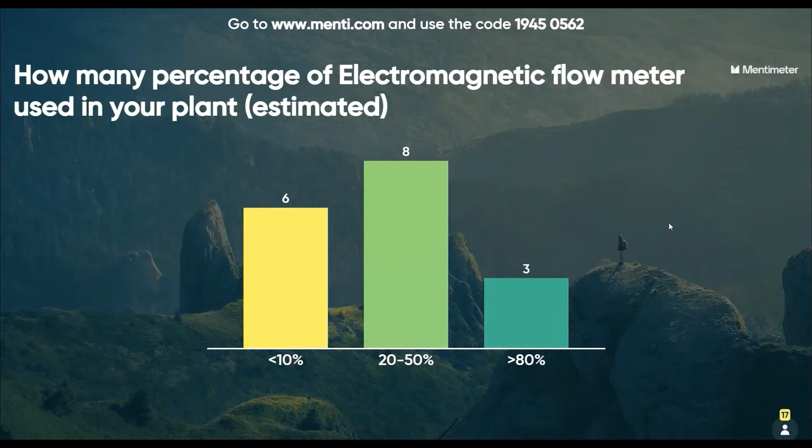And the next question: which function or design would you wish to have in the electromagnetic flow meter? So anything you like for a new function to be added, or a new design also. Just type in your smartphone or your laptop freely.

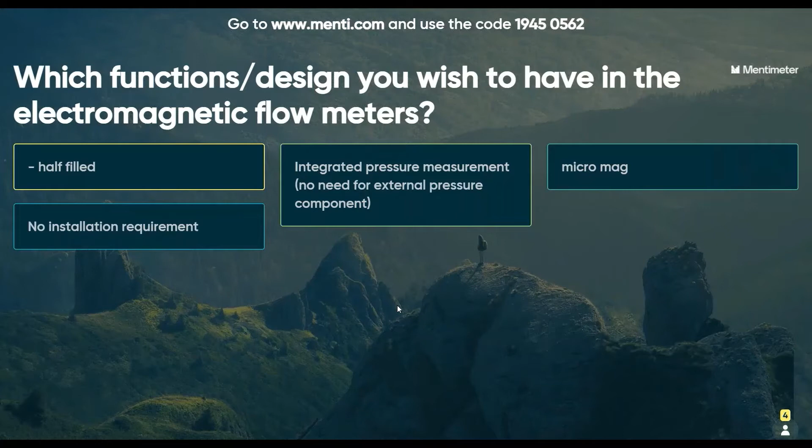Okay, I see some already responded. Half fill, yeah, okay. Normally electromagnetic flow meters require a full pipe, but if you have half fill, you would like to have this. Half fill pipe again, no installation requirements. Okay, maybe I can understand that no inlet or outlet run required. Integrated pressure measurement, no need for external pressure components.

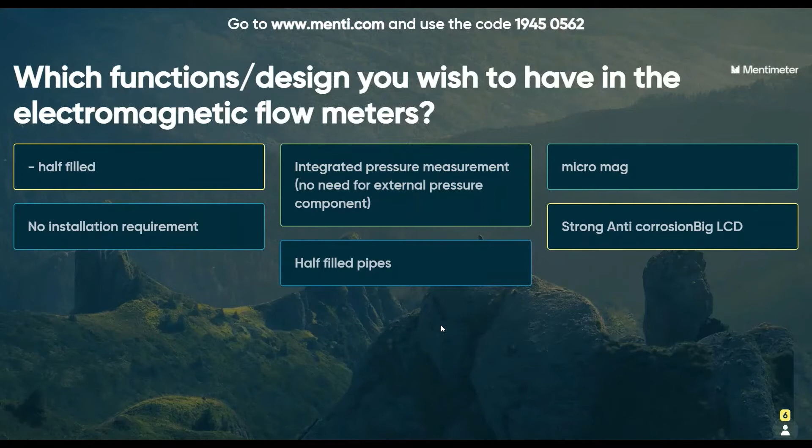Okay, it makes sense. Micromag, yeah, this is for a very small one to use on utilities, if I understand correctly. And at Endress Hauser, we have the Picomag, which can fulfill that for utilities, very small, like pocket size. Strong anti-corrosion, and big LCD.

Okay. We will also have something like that in the near future for the big LCD as well, but not this one. The other transmitter type, anti-corrosion: you can have anti-corrosion based on the electrode selection and the liner selection. Our liner material and electrode material can fulfill almost any application, not only for corrosion but abrasion and other things.

Okay, empty pipe detection, minimum straight run. Yeah, empty pipe detection we also have in almost all our electromagnetic meters. And minimum straight run, there you come to the point. Yeah, we will come into that as well today.

For the half-filled pipe, we also can do this when we do the reduced bore. Electromagnetic meters are normally full bore, nothing inside. But if you have low flow, it can create the phenomenon of only a half-filled pipe, and this creates inaccuracy. So we can use the reduced bore, and at Endress+Hauser we also have that, which also does not require any inlet and outlet runs. But today we will talk about something more than that.

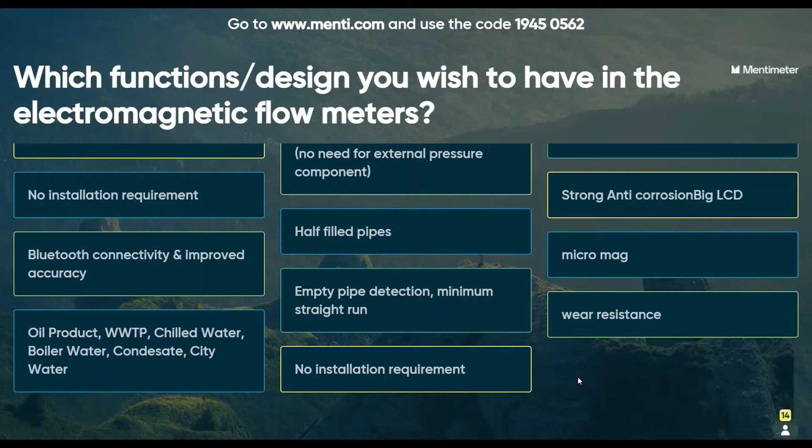Wear resistant, yeah, also the same as for anti-corrosion. No installation requirement, yeah, you'd like to put it there and forget it. Okay, we will come to that. Measure volume flow, yeah, this measures volume flow in the first place. This is the primary variable, volume flow. Okay, partial fill, like before.

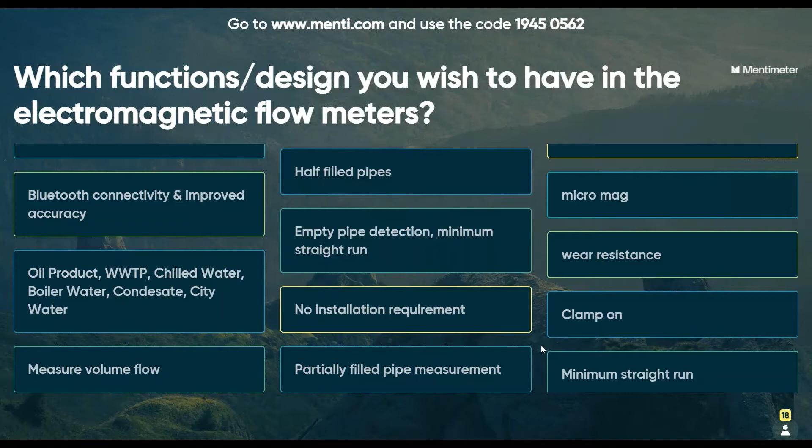Clamp-on. This is very interesting, but mostly we do it with ultrasonic. For mag meters, normally we use inline or sometimes insertion only. It needs something intruding into the pipe first. Okay, minimum straight run. Okay, no preferences. I don't understand this one well. Strong anti-corrosion. Okay, quite a number of requirements.

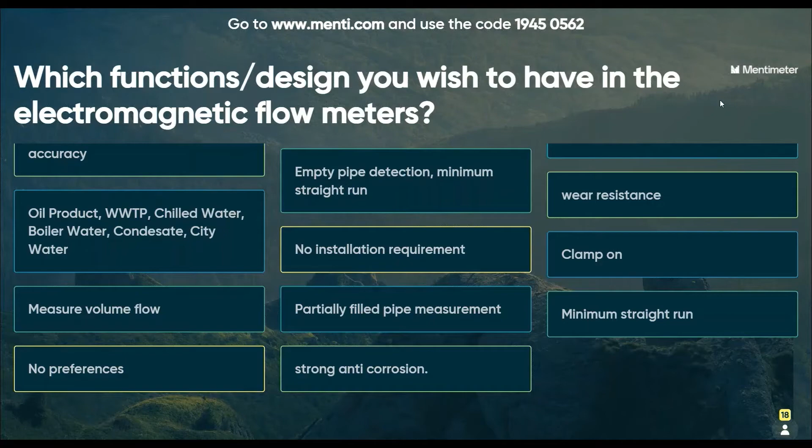Thank you for that. I think now we can come to our presentation, and you will see if we can reach your expectations or your wishes today. Okay. Now I will change to my presentation. Thank you very much for your answers. And now we will go to the next one.

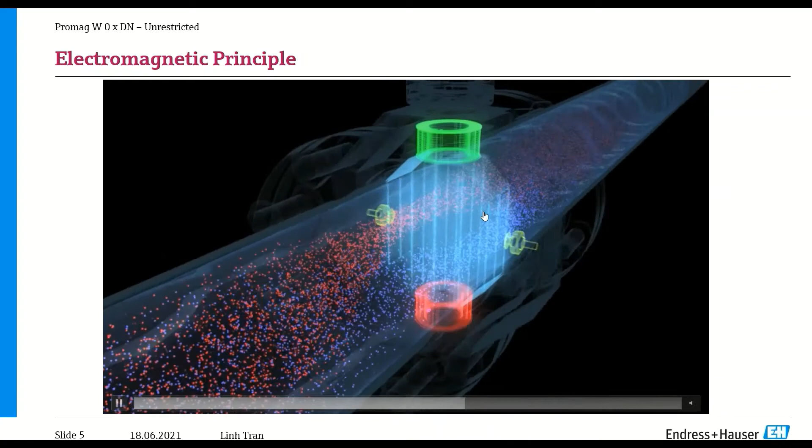First, I would like to come back to the electromagnetic principle. All of you may know about it. We use a conductive liquid, with the blue and red colors representing the plus and minus charges. When we have the coil with the electromagnetic field and the electrodes like this, they separate the minus and plus charges inside, and then they create a voltage difference.

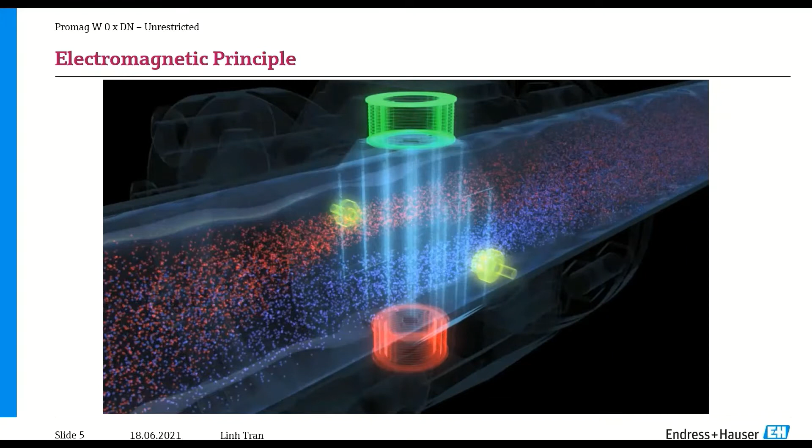And it depends on the velocity. From there, it measures the velocity inside the pipe, and together with the inner diameter of the device, the electromagnetic meter can calculate the volume flow. This is the basic, and this video is already available on our YouTube channel. Okay,

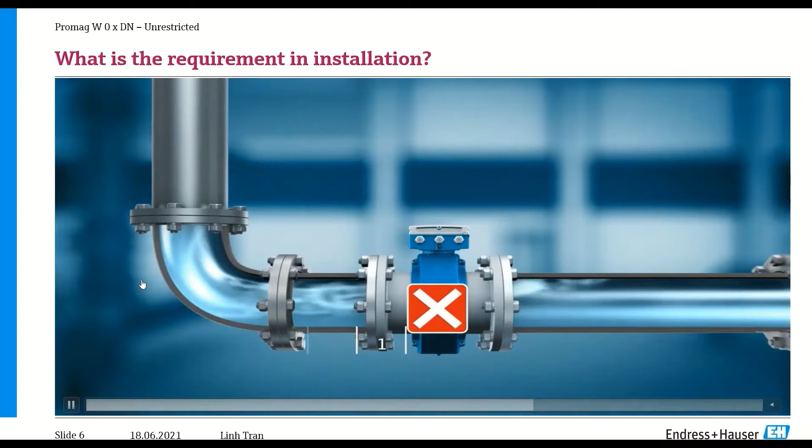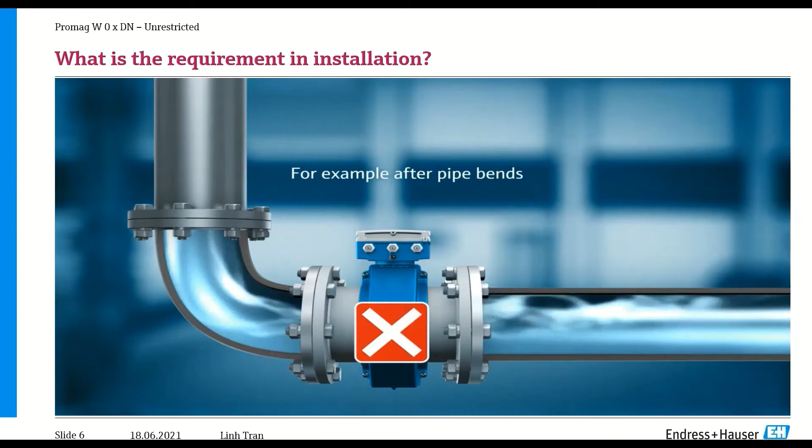so this is a very basic one, but with the electromagnetic meter, the installation requirement is that you cannot install it directly after a bend or any obstruction, and it needs a certain pipe length. We call it the inlet run in front and the outlet run behind, required to achieve a sufficient flow profile to make the measurement possible and the accuracy in an acceptable range. So with electromagnetic, we need sufficient inlet and outlet runs for the measurement, and also for accurate measurement.

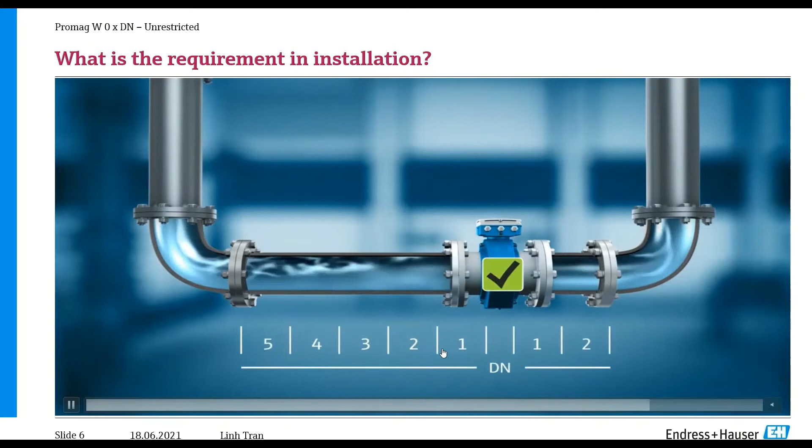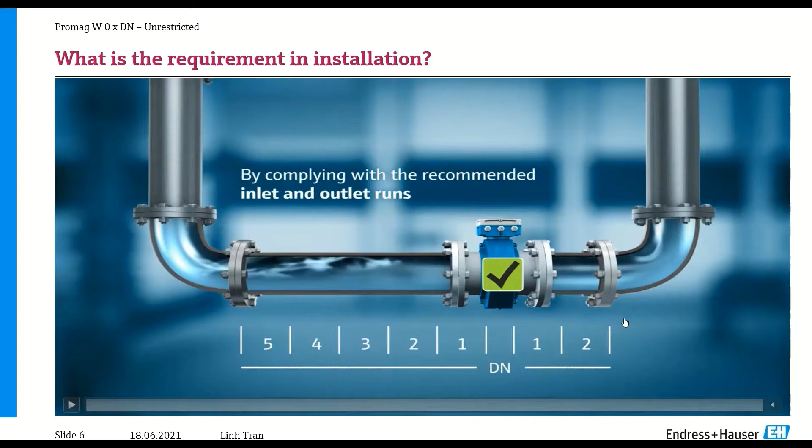That's why you need at least 5 DN in front of the device and 2 DN at the outlet. This is the inlet run and outlet run requirement. But this is sometimes challenging. If you don't have enough space, what should we do to achieve the accuracy? One of the solutions is to reduce the bore of the device so that we can reduce the swirling and have a better flow profile.

And if you have low flow, reduced bore is one of the solutions, but it creates pressure loss. In a skid or in some processes, pressure loss means you need a more powerful pump. This is a problem for electricity as well, and you also have to buy a bigger pump. Okay, it affects the capex. So there is a new solution. We come with the new solution you see on the screen, slide number 8 right now.

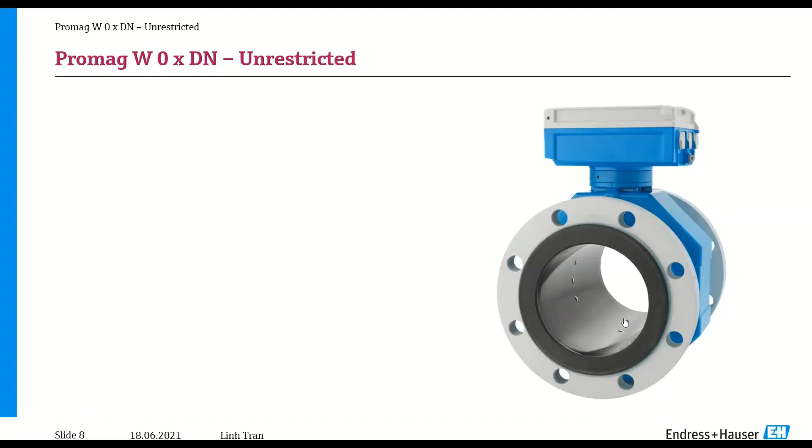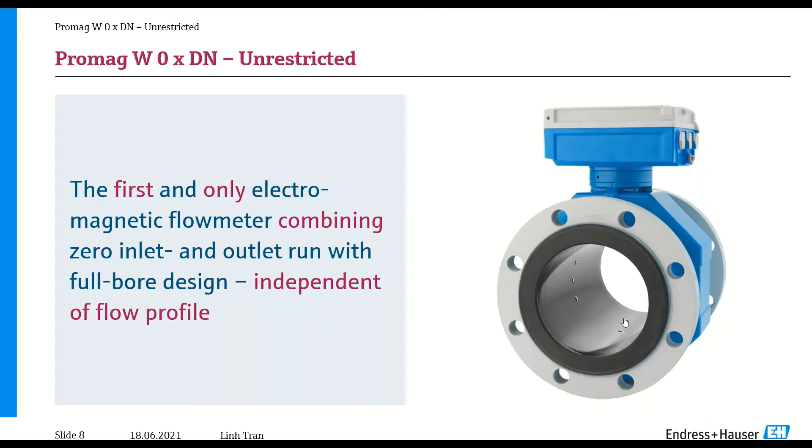The device is full bore design, and this is the first and only electromagnetic flow meter combined with zero inlet and outlet runs with full bore design, independent of the flow profile. There is almost no restriction on installation with bend and obstruction, and you can mount directly after that, so no pressure loss as well.

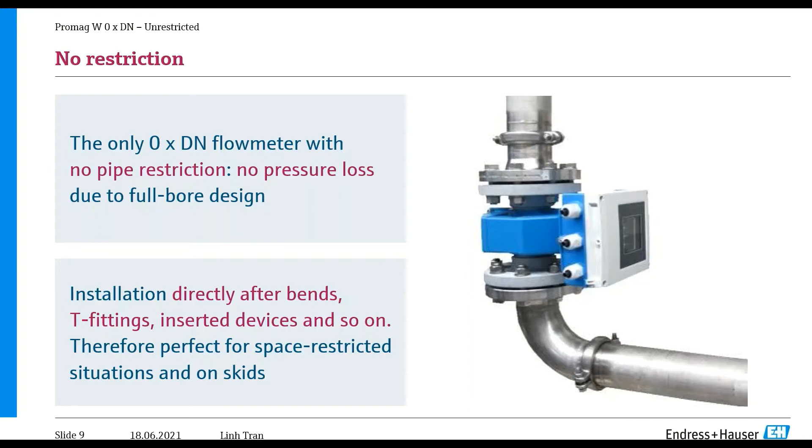Okay, so the cornerstone, the technical spec of this one. Let me check again if we have any problem right now. If not, okay, everything is good right now.

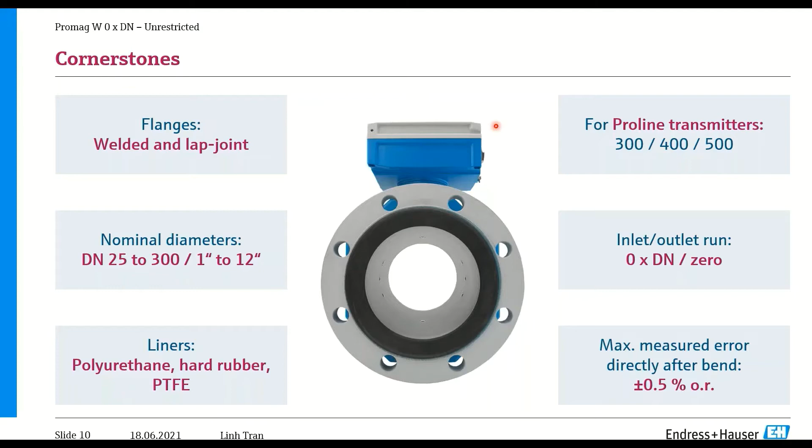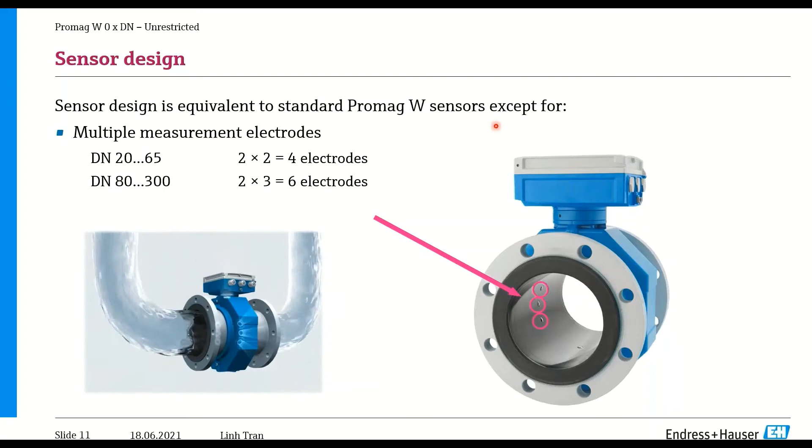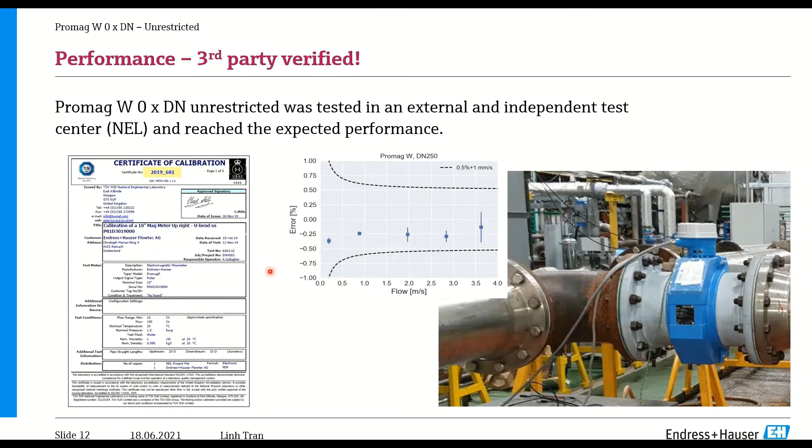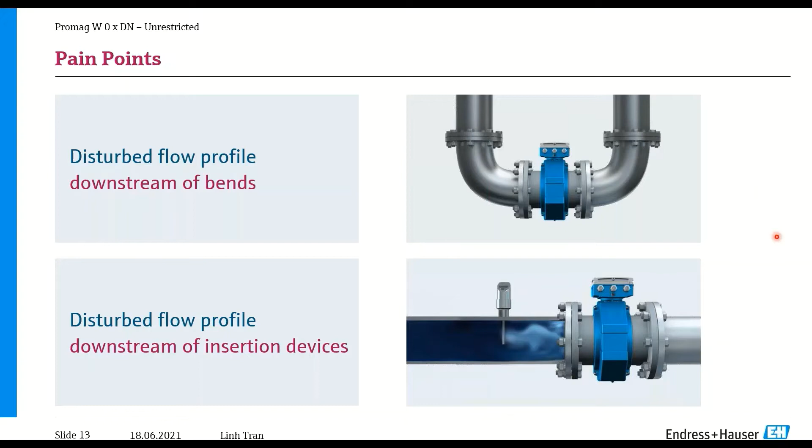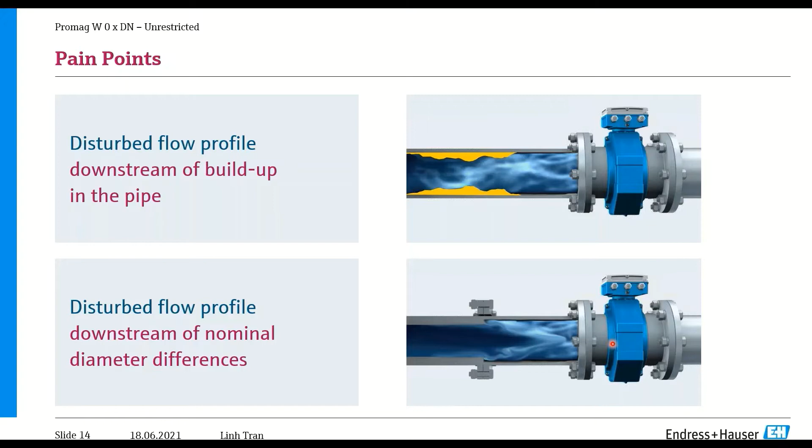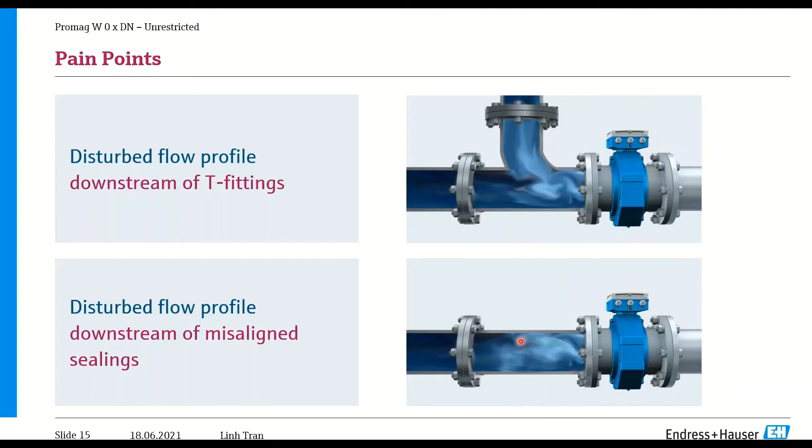As well, for the tee fitting - the tee is also something that can create a strong disturbance on the flow, and with Promag W, you can use it directly after the tee. Another situation is misalignment of the sealing or the O-ring, meaning they don't perfectly fit inside the flange but protrude a bit into the inside diameter, which can also create swirl flow. You can use our new Promag W in this situation.

So this is some briefing about our electromagnetic flow meter. Now just wait a moment, don't go anywhere - I'm not finished yet. We have one more thing to show you about this product.

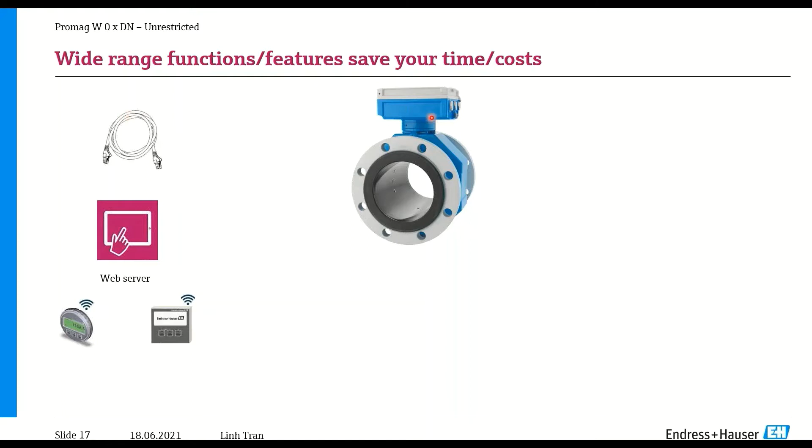This is another wide-range function feature that saves your time and cost. First one, webserver. I hope you've heard about this with our new Proline 300, 400, and 500 - you can use the webserver built into our device, and you can use the LAN cable for point-to-point connection, or go into a switch point to connect many devices.

Via the LAN cable, you can connect to the laptop directly and just use web browser software already in your laptop, like Chrome, Internet Explorer, Firefox, etc. You put the IP address of the device into your browser, and then you can go directly to do the configuration for the device - you don't need any software installed in advance. It works with almost all communication types: Profibus, and others, Ethernet, HART, etc.

And other than that, if you don't want to use the cable, you can use the Wi-Fi option. With this, you can use your mobile device, smartphone, tablet, and laptop to wirelessly connect with the device directly, and also use the webserver to do the configuration.

It's very, very easy. Actually, you can use the traditional way with the push buttons on the device transmitter, but it takes time and requires a bit of patience. But with this one, it's very intuitive - I can show you later. And the next one, we have a wide-range power supply.

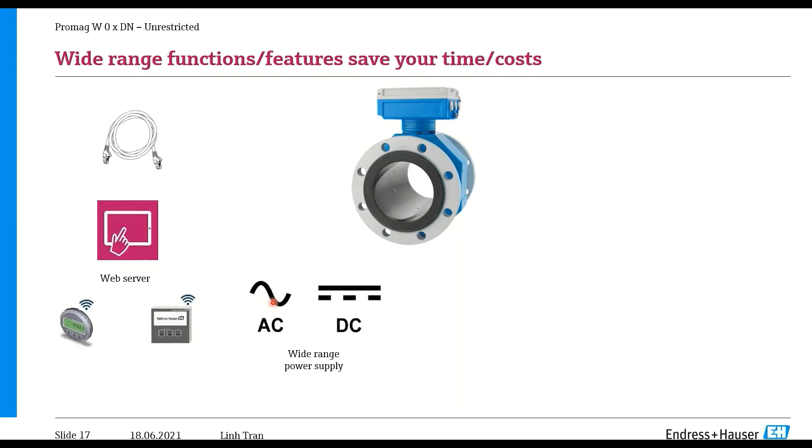This means you can use either DC voltage from 24 volts up to 230 volt AC, either one, so you don't need to select the option. If you have one device in a non-hazardous area, you can use DC or AC for it, no problem at all. Except if you use it in the hazardous area, the explosion area, you have to specify this device as DC only or AC only. But in a non-hazardous area, whatever power supply type you have, from 24 to 230, you can power this device.

Configurable I/O, now I'm on slide 17. If you're not here, just let us know. So the configurable I/O is also a special feature that we implement in our 300 and 500 devices.

That means with analog output, now you don't need to change any physical I/O board anymore. For example, if you like to change from 4-20 milliampere output to pulse frequency output, before you needed to change the card physically, open the transmitter, pull out the old card, put in the new one. But with configurable I/O, you can use only one card, called a multifunction I/O, so you can change the type of analog output or input directly in the device menu. For example, first you set this 4-20 milliampere output, but then you want to change to pulse frequency, you don't need to change the card, just keep it like this.

You don't need to open the transmitter, no. You just go to the webserver, the easy one, to change the output from 4-20 milliampere to pulse frequency in the drop-down menu. You have 4 possibilities and you can change one by one, only one used at a time, but you can switch. You don't need to use any additional card. It reduces the stock as well, you just keep the same card on the stock.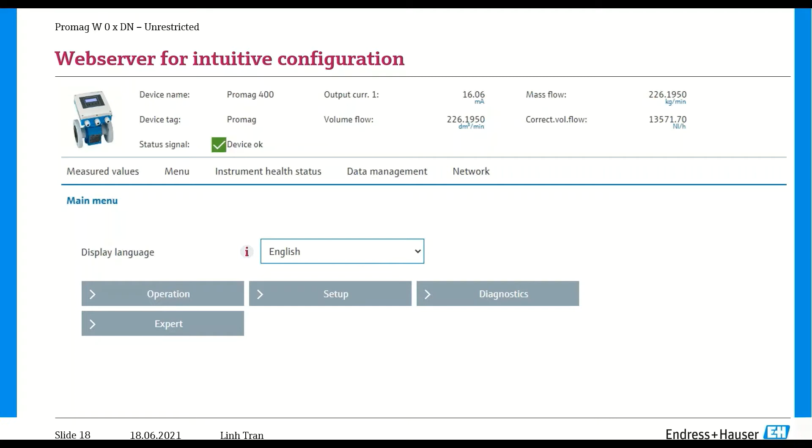Next one, heartbeat technology. I actually had an online seminar about this innovative function last year. This is heartbeat technology for device health monitoring and predictive maintenance. It has three main functions. The first one is diagnostics, meaning the heartbeat will diagnose and check your device 24 hours, 7 days, and show all the device status.

It's simple, like: is the device okay, failure out of spec, maintenance required out of spec, function check, something like that. This is according to NAMUR NE107, the international standard for device diagnostics.

Secondly is verification. This is also a special function where you can run verification for your device, for this Promag W in particular, without interruption to its operation, meaning the device still operates, still sends the signal, and you can do verification in parallel. You don't need to stop the process or stop the device.

Everything is built in, and it's also certified by the third-party TUV for the operational reliability of the heartbeat technology according to the ISO 9001 standard. More detail will come up. If you have any questions on that, contact me and I can give you more detail on this one.

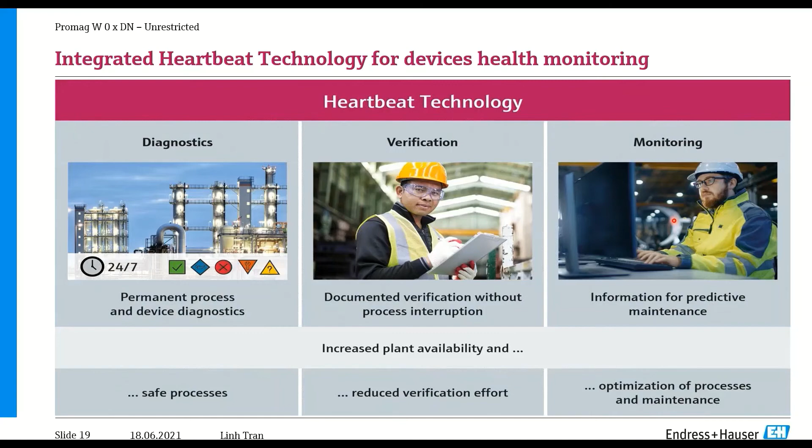And the new one together with heartbeat is the buildup detection. You know that our device measures water like this in mining or with much slurry, so they can create a buildup inside the pipe with a certain thickness - this is the view of the buildup. When they create a buildup like this, it can reduce the full bore, and also somehow it can disturb the signal, so it cannot measure correctly or perfectly anymore.

So normally now we don't have a person in the plant, so you hardly know the condition of the buildup. You normally do it on a timely basis, or depending on the process, maybe every 6 months, 1 year, or 3 months - you have to unmount the device to check and clean it. So somehow this creates a lot of effort - maybe too soon, maybe too late.

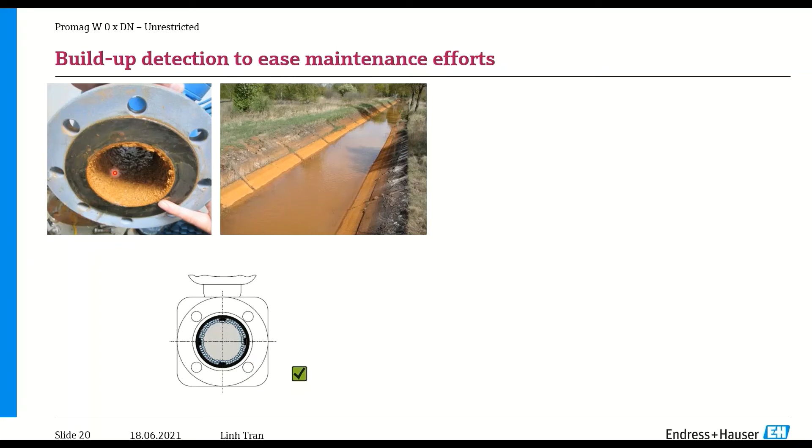You don't know. So we launched a new feature called buildup detection together with heartbeat technology for monitoring. This belongs to the heartbeat technology, okay? And then it can show you the buildup index by percentage. Please note the buildup index goes from 0% to 100%, but it doesn't mean 100% that the full pipe is blocked - it just shows you the situation and trend of how the buildup develops inside your pipe.

And if you want to know the buildup thickness, you need to first double check the device. If you see about 20%, with your normal maintenance you already know how much thickness you should clean. So then you unmount the device and check if the thickness has reached the normal value. If not, you can let it run a little bit more, until you check if the buildup has reached the maximum or warning level, then you take that as your maximum level.

Okay, as actually in our device, we can set the threshold for that. For example, we set about 50%, and it will trigger an alarm. But for easier checking, the first time a little more time is needed to commission this. But once it's finished, it runs very smoothly, and then you just set the alarm - for example, if you see 40% already reaches the limit of buildup thickness, then you set it at 40%.

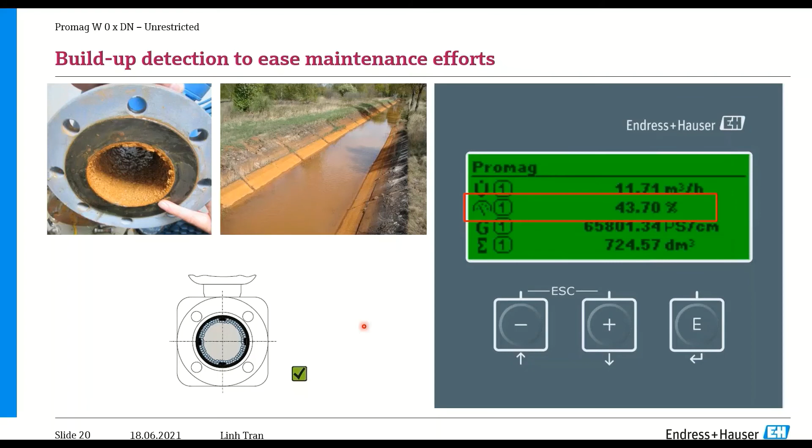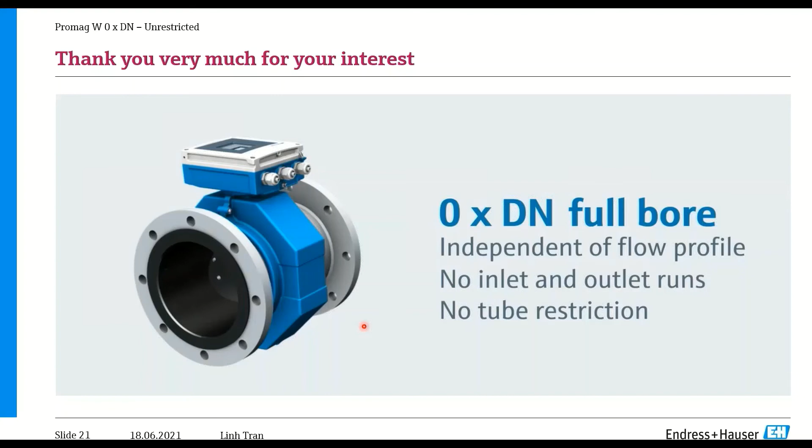Okay, so this is the finish of this presentation about our device, the Promag W full bore 0 x DN, and also the other features I already presented to you. Thank you very much for your interest, and any questions?

Okay, I also see there's one question from Glenn - does this new model have the same accuracy as the model that requires straight pipe runs? Yeah, there are two cases that will happen. If you choose this new model and install it with inlet and 2DN like a normal case, the accuracy is still secure, okay, that's it, of course.

But when you don't have the inlet run, you can put it into a very narrow space, 0DN, and we can also still reach plus minus 0.5% in the reference condition. Normally, with the straight pipe run required, 0.2 or 0.5 is normal. But with zero inlet and also full bore, no pressure loss as well, we can also achieve 0.5% in reference condition.